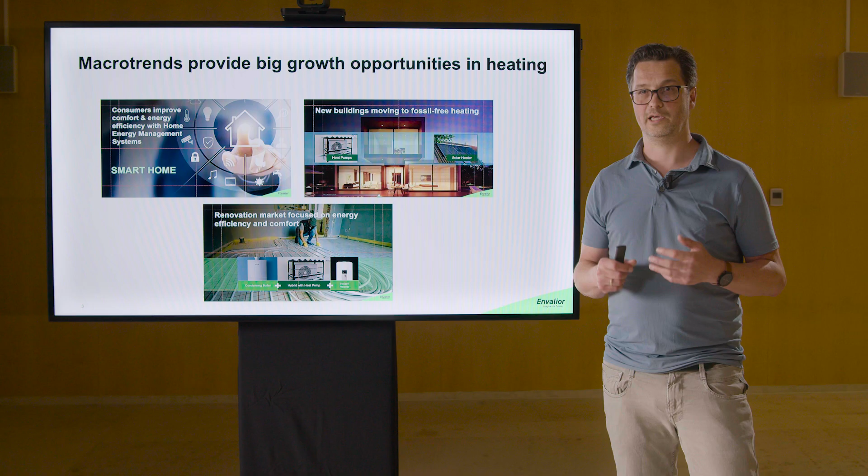These macro trends really provide changes, but also big growth opportunity for the industry. Governments and consumers are investing more money to become more energy efficient and less dependent on fossil energy. Simultaneously, the fast-growing middle class is also investing more money in comfort in and around the house. This is further accelerated by COVID-19, which changed the way we work by applying a virtual-first culture. We simply invest more money in our home as we spend more time at home. So what does it mean for the industry in heating and cooling?

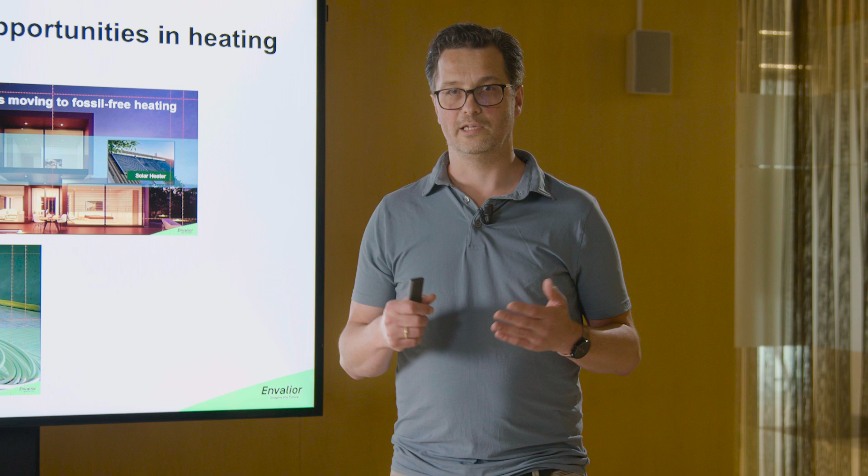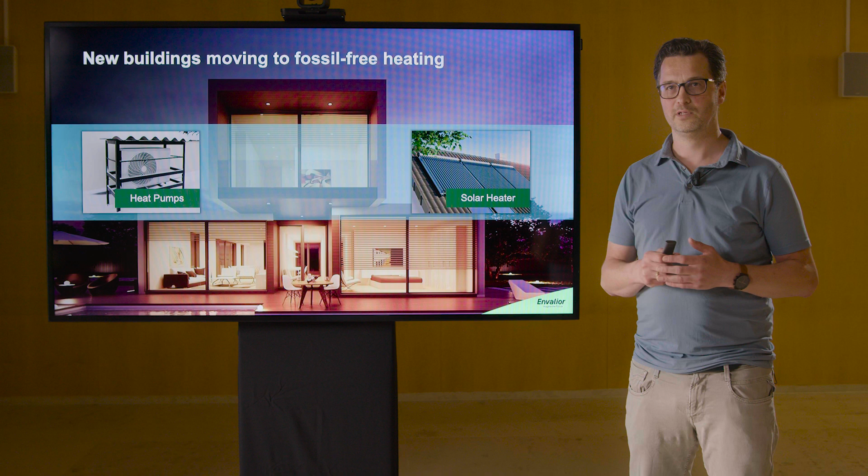For new buildings, the isolation is often much better, and the desired low-temperature floor heating is sufficient to provide comfort. Fossil-free heating and cooling is therefore more common practice, and in many countries even obliged by governments for most new houses that are built. Gas and oil heaters are less needed for new houses as they will be equipped with heat pumps and solar energy systems. And lately we do see that the electricity grid is not always ready for increased electricity consumption, which is somewhat slowing down this adoption.

So for renovation of existing houses, the government guidance and consumer needs are somewhat different. I have that on the next slide.

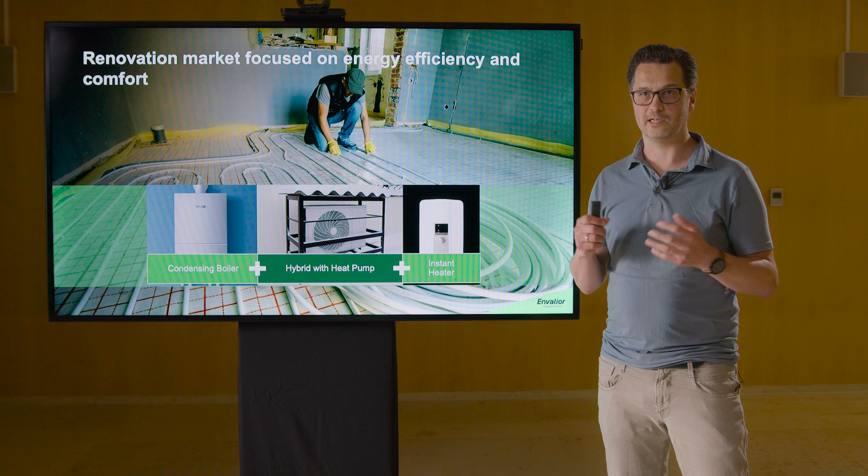For renovation work, there's also a clear wish to become less dependent on fossil energy, to reduce the energy consumption and to increase the comfort. For relatively new and well-isolated houses, it is technically still possible to become fossil-free, but it's still a big investment to switch to low-temperature heating and to heat pumps. So for all the less isolated houses, the total investment cost and space needed to become fossil-free remains actually a big challenge. So for renovations, most governments require hybrid heating systems as a minimum to reduce the fossil energy consumption.

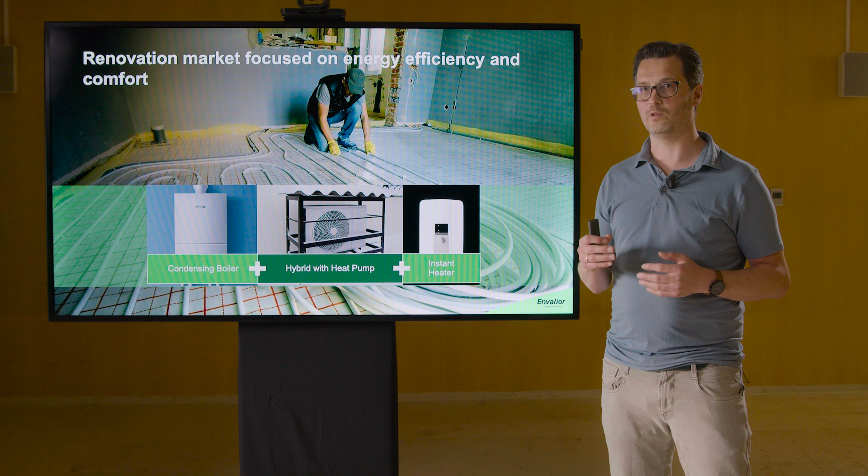So to save more installation space and to improve comfort, consumers often also choose to have an additionally small instant flow heater, as you can see here on the slide.

Also in every household, prioritizing energy management and cost efficiency is increasingly crucial. Internet-connected smart heating and cooling systems are streamlining energy usage and expenses. Solar energy is harnessed and utilized in real time or stored for later use. Electrical vehicles need to be charged, but can also act as a potential home battery. Next to that, you see automatic solar screens help to regulate the indoor temperatures and prevent unnecessary cooling. The significance of home energy management systems is on the rise, ensuring comfort and facilitating seamless communications between all the devices.

All these macro trends require you to increase the innovation speed, and this is also a big growth opportunity for you. You really need to catch up to survive in general.

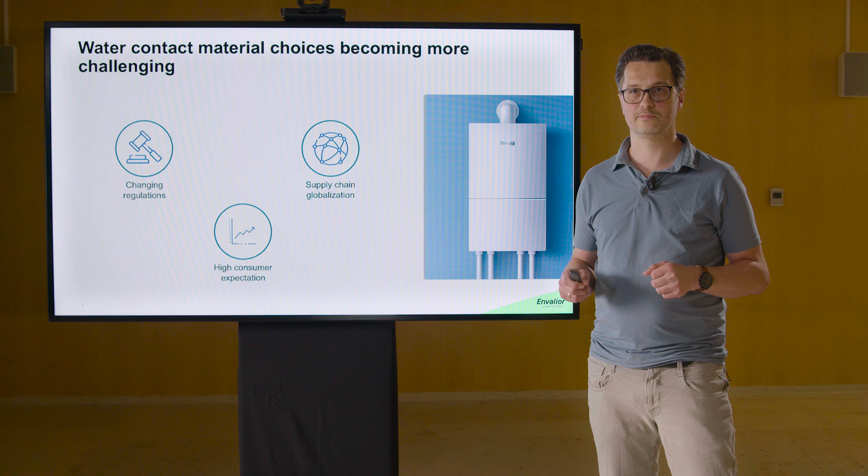You may expect that part functions are changing as well, and the design space becomes tighter, and as a result the material requirements are changing. All those growth opportunities are great, but as if growth itself is not challenging enough, there are additional big challenges making your life harder. So let me elaborate on those a little bit.

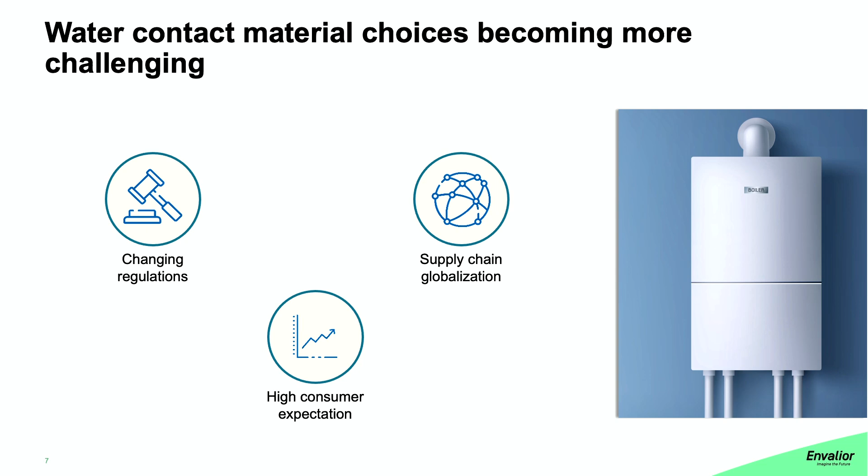You must keep up with all the regulation changes. With recent big global events, people now also realize more and more that we have a very complex global supply chain. And lastly, consumers have high expectations. They want a good price, and can easily find information online on brand performance. So choosing the right water contact material is becoming more and more challenging.

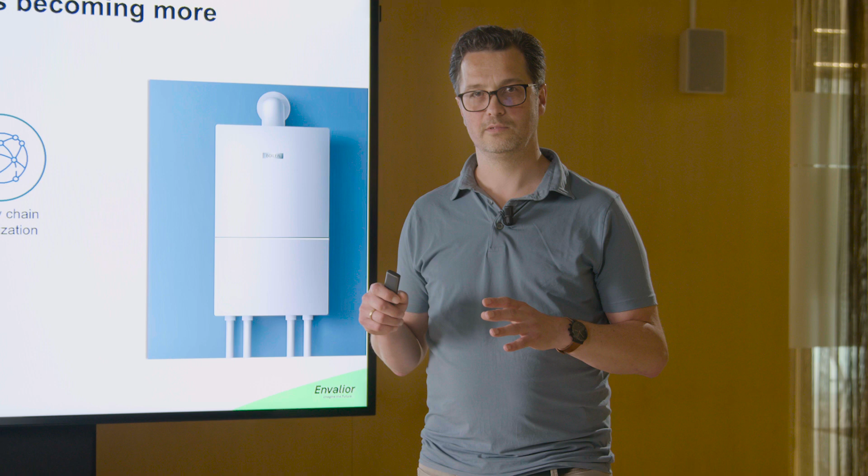In general, when choosing water contact materials, there are several key factors influencing the choice. Traditionally, many parts are made from brass, but this is becoming increasingly expensive. Especially for higher production volumes, plastics become much more attractive.

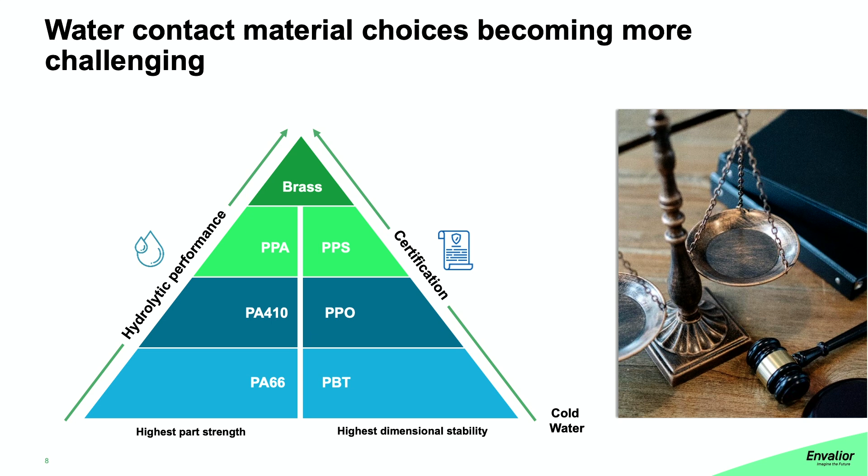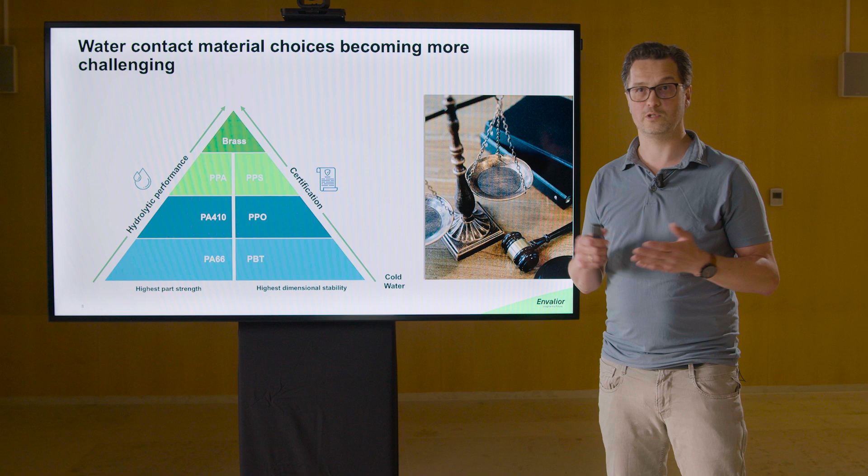Many companies often like to work with polyamides as they are tough and reasonably priced. For higher use and certification temperatures, you really need to have hydrolytically more stable or lower leaching materials. You can, for instance, think about polyamide blends, longer chain polyamides like polyamide 410, or semi-aromatic polyamides as shown here on the slide. When a part needs to be with very high precision, typically they choose PBT, PPO, or PPS, depending on the certification needs.

Brass is still often used but becoming a more and more expensive solution. Most common plastics to replace brass parts in this market are PA66 and PPO. And for many parts, the performance in the application has been good enough, so they are widely available, affordable, and good to work with, making them a preferred first choice.

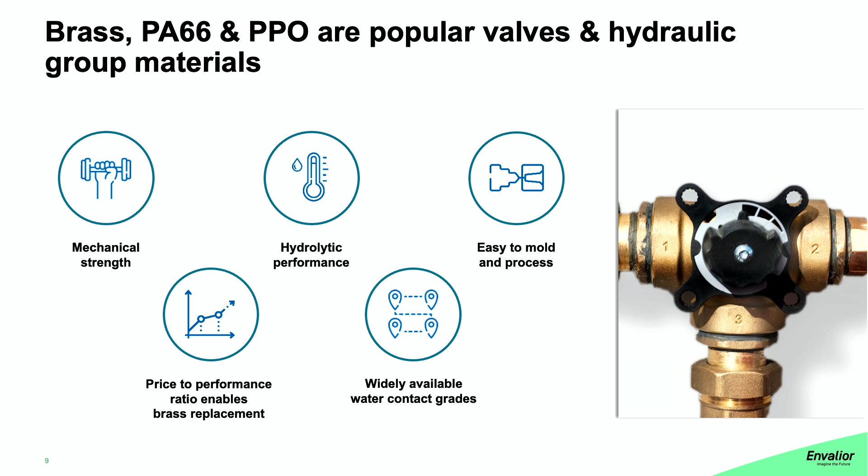However, in recent years, these materials have become under increased scrutiny as regulations tighten. For instance, compliance with the new KTW BWGL, the German drinking water contact regulations, is becoming more and more challenging at high temperatures due to the elevated leachable levels of PPO and PA66.

Furthermore, after years of use of this material, the design limitations of these materials have been reached. The room temperature mechanical performance of PA66 and PPO are constraining factors, especially significantly affecting the reliability of the parts in use and in assembly because they are working at the design limit. This constraint reduces further design flexibility and contributes to escalated development costs and timelines.

Finally, for PA66, significant supply chain constraints have been observed. The raw material supply chain is predominantly controlled by 3 global companies. Multiple force majeures in recent years have demonstrated a big impact on both price and availability.

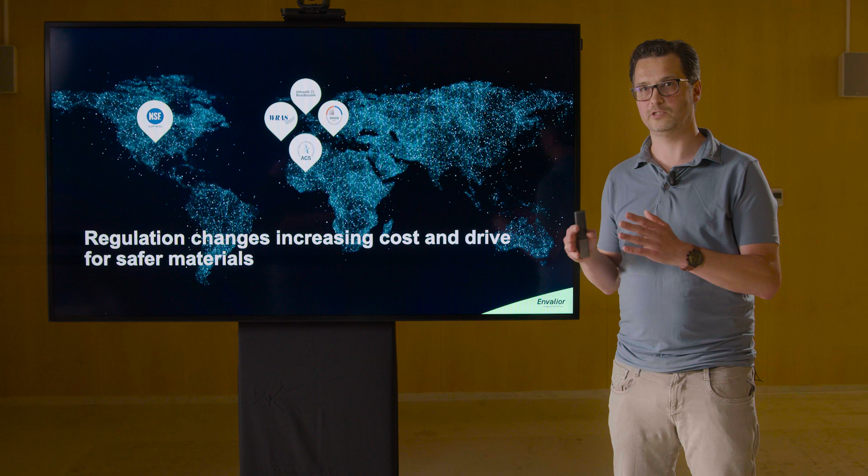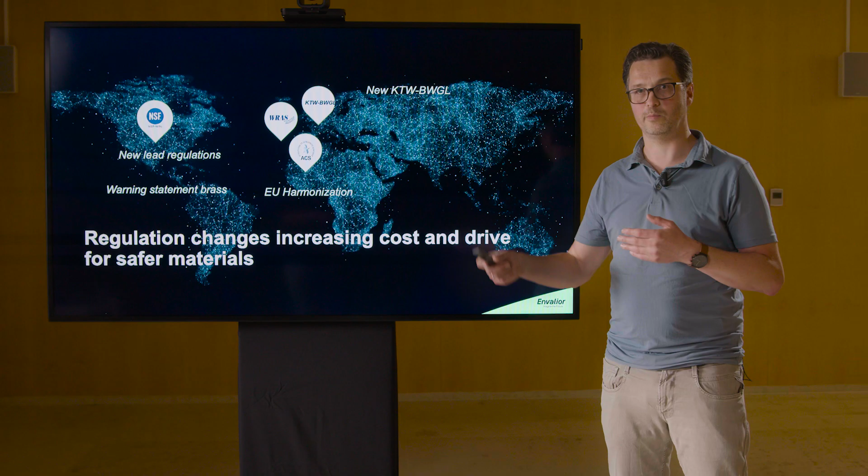So regulation change due to increased toxicological insights have a big impact on development cost and drive the use to safer materials. In Germany, the new KTW BWGL regulation is recently put into place. In the US, there is a new regulation regarding lead. In Europe, harmonization of the European water contact regulations is expected to come in a couple of years. So all these changes typically are accompanied by large certification costs and long certification lead times.

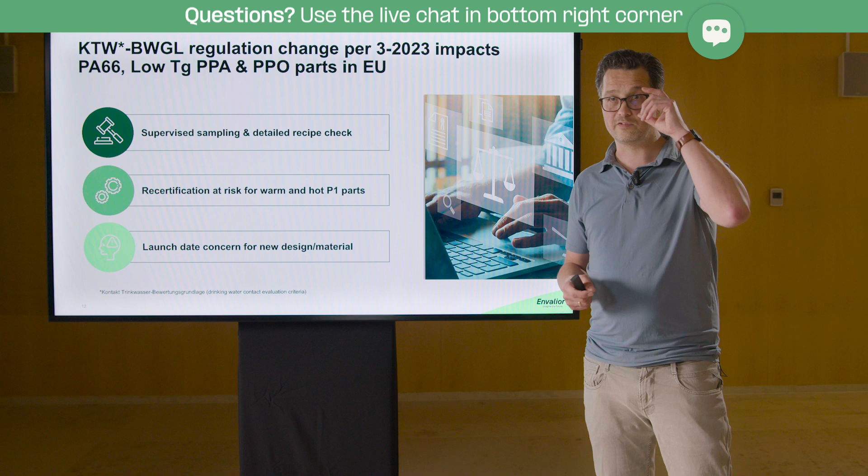To give some examples of the impact of regulation change, we have seen that many warm and hot water contact components require a material change as the material is simply no longer certified due to the stricter KTW regulation. The regulation now requires supervised sampling, and the recipe check is stricter and more time consuming.

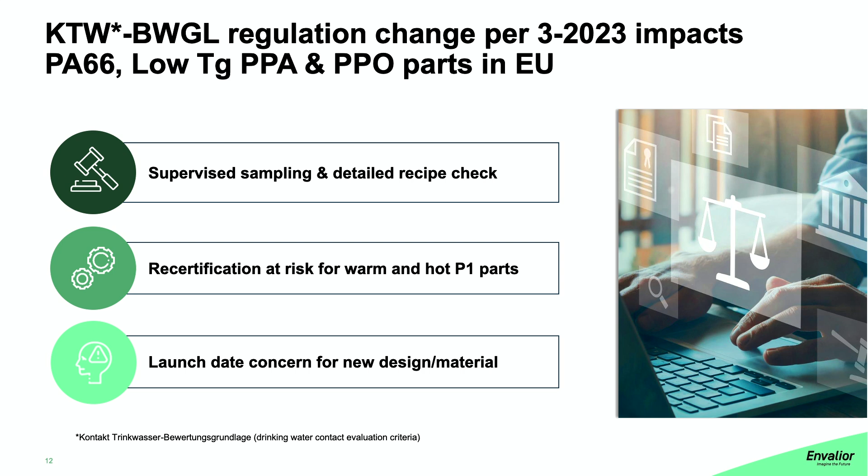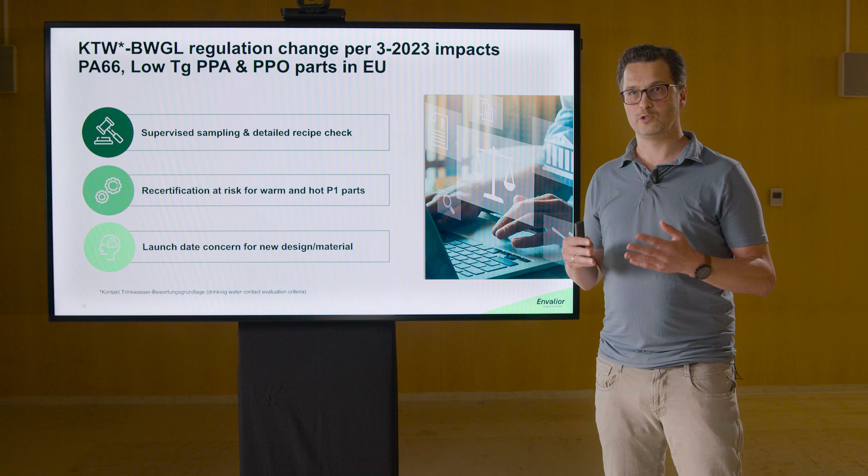Overall, this is increasing the cost and time of certification of both the material suppliers but also of the component manufacturers. We have encountered cases where this required a material or a design change, resulting in a big concern on reaching the launch date, but also large costs were made for these changes. And in some cases, even decisions were made to discontinue the offering of the final application in Germany, for instance.

In the US, the water contact regulation for endpoints has been changed. California Proposition 65 required lead-containing brass parts to be labeled with a cautionary statement. This is obviously a concern of negative brand exposure and cost to change the material.

In Europe, lead is labeled as a substance of concern. It is, however, still unsure how this affects the future regulation related to the production of brass and also components made thereof.

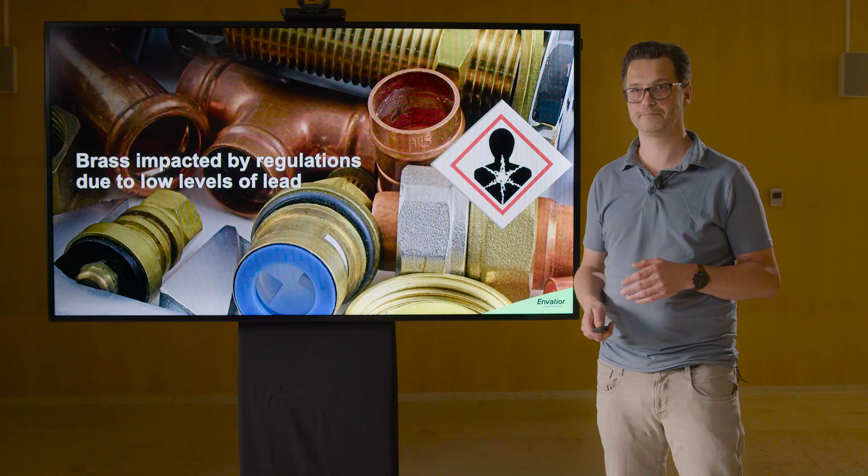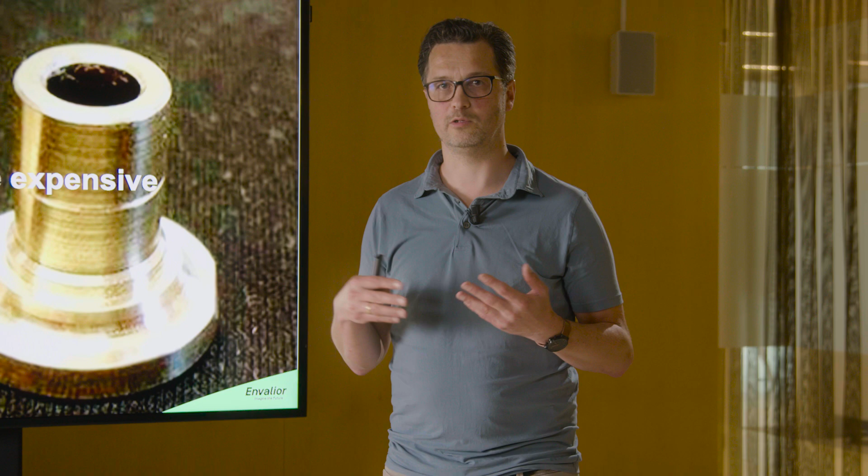Despite that brass is installed as favorite material, switching to a lead-free brass is not always desired. The raw material and production costs will significantly increase. The more complicated parts, the bigger the production cost difference, as machining becomes much slower and with worse product quality, leading to more quality issues. Especially for larger volume parts, the switch to plastics has really become much more attractive.

The past years, we've painfully experienced the drawback of our global supply chains. There have been many disruptions due to geopolitical events, COVID disruptions, and a gradual change in automotive materials consumption. These severely impacted the cost and availability of materials, parts, and end products. And companies want to be less dependent on supply chain disruptions, and this made companies consider their contingency plans in relation to material choices, production locations, but also second sources.

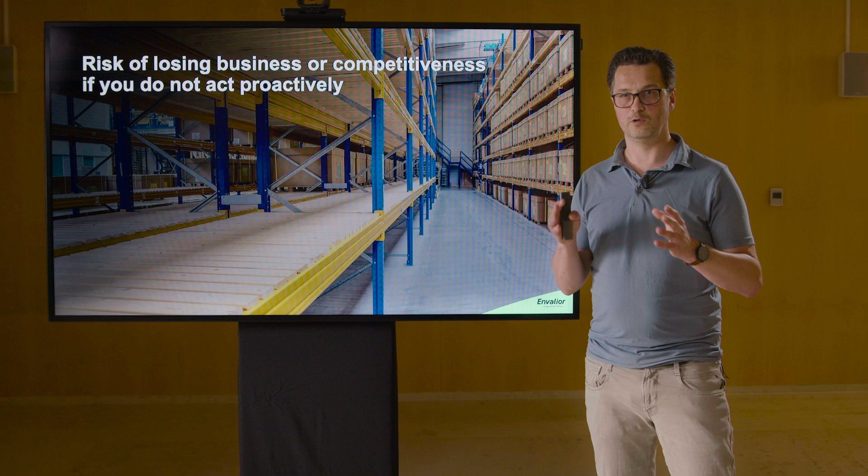So with all these challenges, there is a serious risk to lose business or competitiveness if you do not act proactively. Material change programs requiring redesign and retooling is typically costly and take a lot of time. Demand of new compliant materials increases exponentially, and forecasting is not possible if the material is not yet qualified. A worst case is a product which is not yet certified or that raw materials cannot be supplied, leading to delivery delays and lost shelf space.

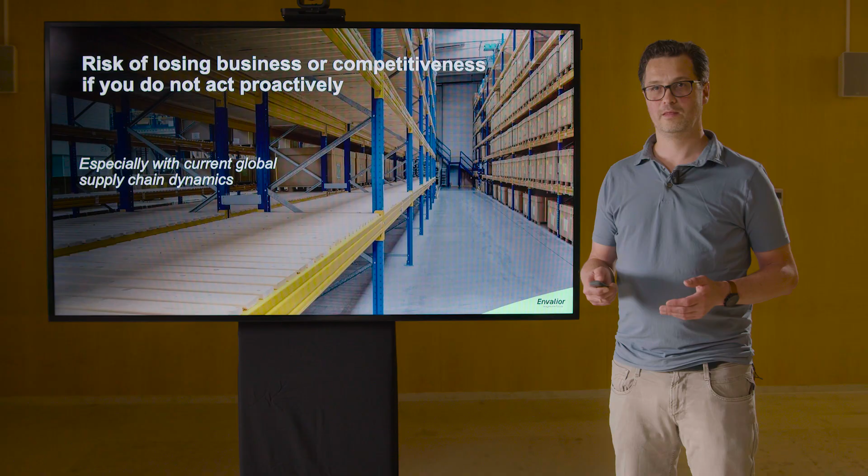We all know that the material or design change is a hassle and is costing a lot of time and money to select the right solutions. To meet the clock speed of current market dynamics, you sometimes need to innovate faster than you would have done in the past. With the increased speed, the risk of part failing at the consumer is also increasing. This risk and the earlier mentioned risk are something we all like to prevent. So what can you do to reduce these risks?

On a high level, a global development partner is needed who can help you reduce those risks and accelerate brass replacements with low leaching, high strength materials, and of course application development support. This can help you future-proof your designs for regulation changes and large supply disruptions. It is important that this partner has several material options available, as each design will have its own challenges.

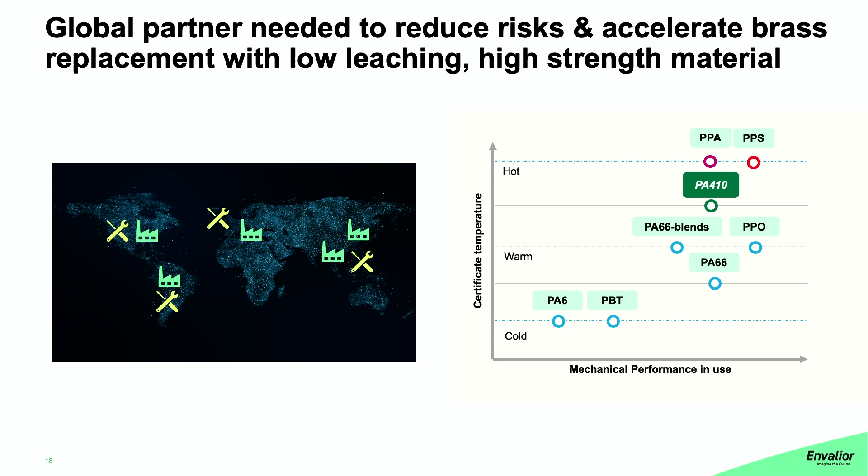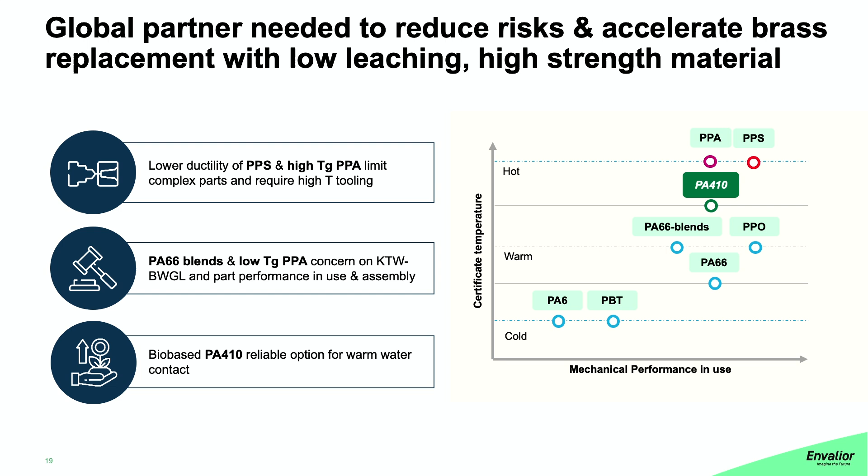PPS and high glass transition temperature PPA are very good materials up to hot water certified parts, but not always practical for complex parts as they require high temperature tooling and have a lower ductility. PA66 blends and low TG PPA have a concern on the German KTW certification for warm and hot water, but also on performance in use and in assembly.

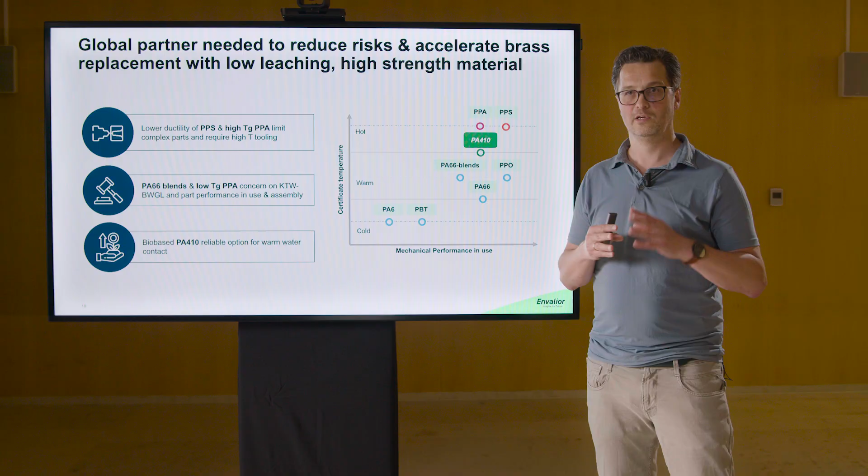Longer chain polyamides, such as polyamide 410, can be a very good option for many warm and hot water certified parts. And for warm water contact parts, PA410 can actually improve the reliability in assembly and use, but specifically for German KTW hot water P1 parts, they are simply out of reach for this material. As you can see, each material has pros and cons, and technical support can help you make the right choices.

I think Envalior can be that partner. We have a broad and safe water contact portfolio and supportive competences from material know-how to CAE and part design to prototyping and cost estimations. This helps you reduce risk and increase the speed of your innovation. In the next couple of slides, I'd like to give you some examples how we can help reduce risks and increase your innovation efficiency with our materials and support.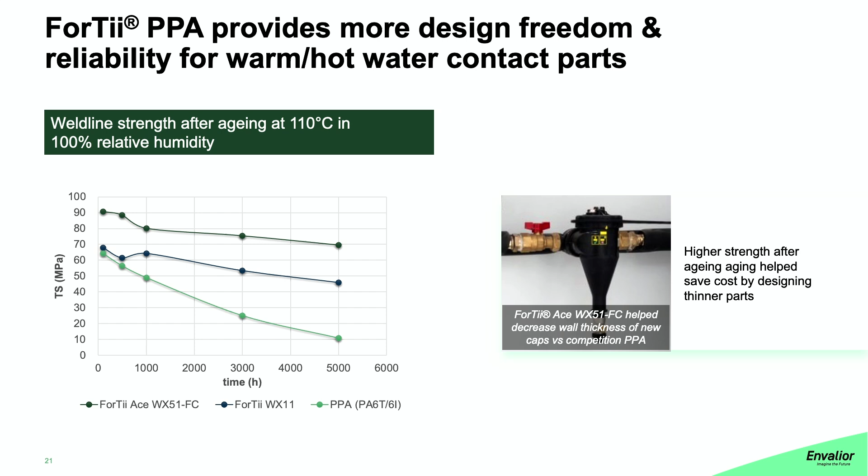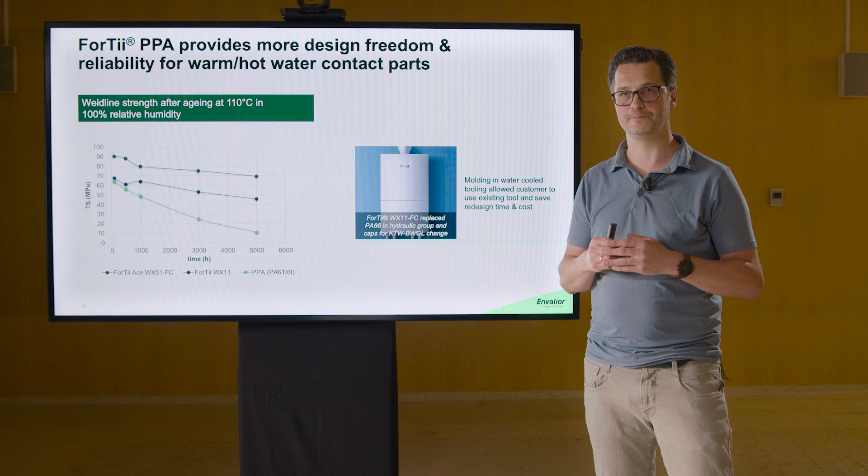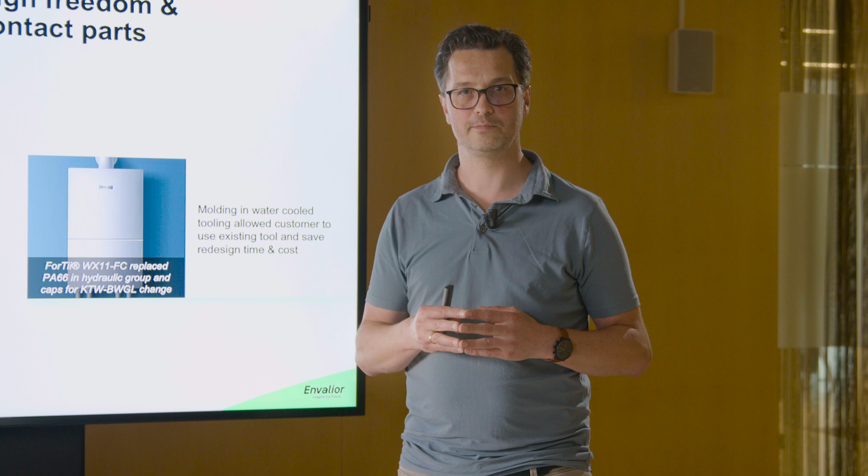There's also a second ForTii PPA example, that's ForTii WX11-FC, which also has a good weld line strength retention and can be injection molded in water-cooled tooling due to its good flow and lower glass transition temperature. This grade allowed the customers to replace PA66 in the hydraulic group components, which was no longer able to meet the new KTW regulation requirements. With minor adjustments to the water-cooled and complex injection molding tool, we have been able to switch it to a ForTii. This prevented a costly and time-consuming full redesign of all the parts.

As you may know, for PPS, flash is often an issue. It causes post-processing of injection molded parts, is aesthetically not pleasing, or it causes some flow restriction in the application. Our Xytron PPS hot drinking water contact grades offer a good balance between flow and flash and provide a high quality, reliable and aesthetic looking part.

In terms of mechanical performance, it's very much on par with competition PPS, as you will see on the next slide. Overall, the performance and aging of our Xytron PPS, as shown here by the plots, has good weld line strength retention, similar to competition PPS. Due to the better flow and flash balance, our Xytron G4020DW-FC provided additional reliability for parts where the initial weld line strength is challenging due to the flow critical cavities.

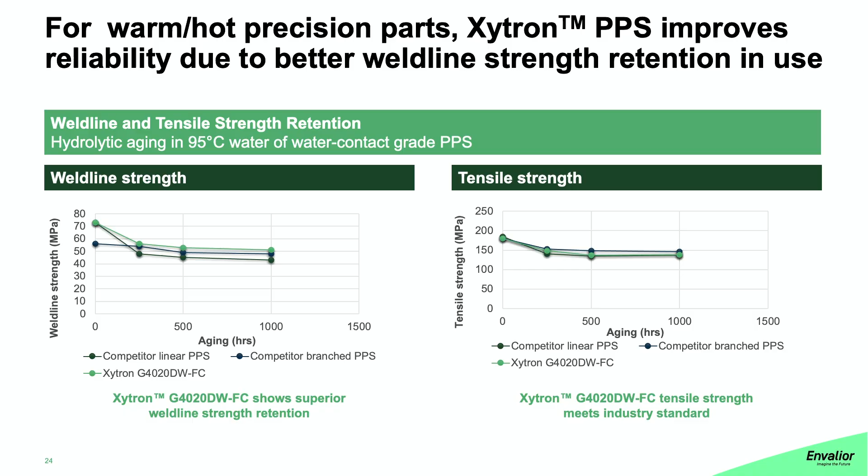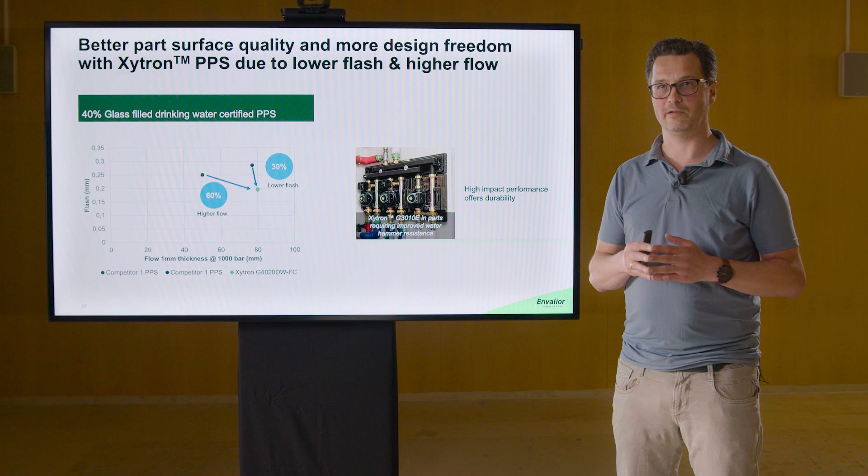Similar to the standard 40% glass-filled solution, our hot drinking water contact certified 30% glass-filled and impact modified PPS offers additional reliability when the part sees a lot of repetitive water hammer impact. Similarly, its toughness helps to improve the initial burst pressure.

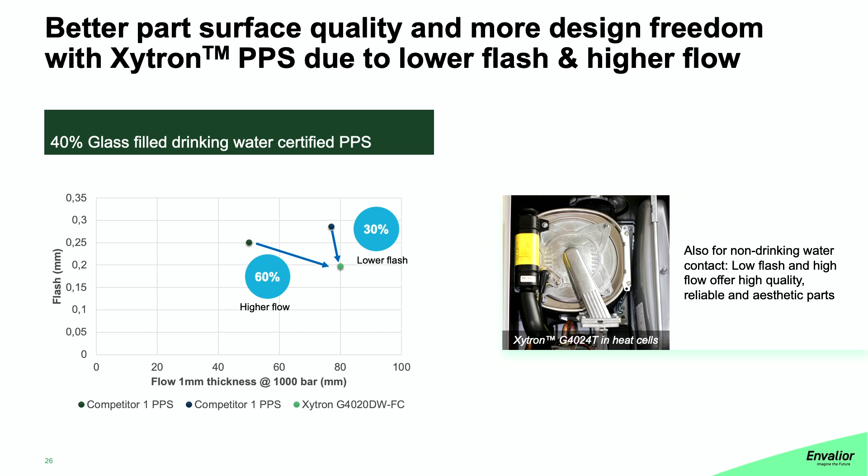Xytron PPS is also used in non-drinking water contact parts where productivity, high temperature hydrolysis resistance, and chemical resistance are key. You can think, for instance, of this condenser unit of the heat cell of a gas heater. Xytron PPS provides on-par part performance with similar competition materials and can be used in the same tools. This has helped some of our customers strengthen their contingency plans.

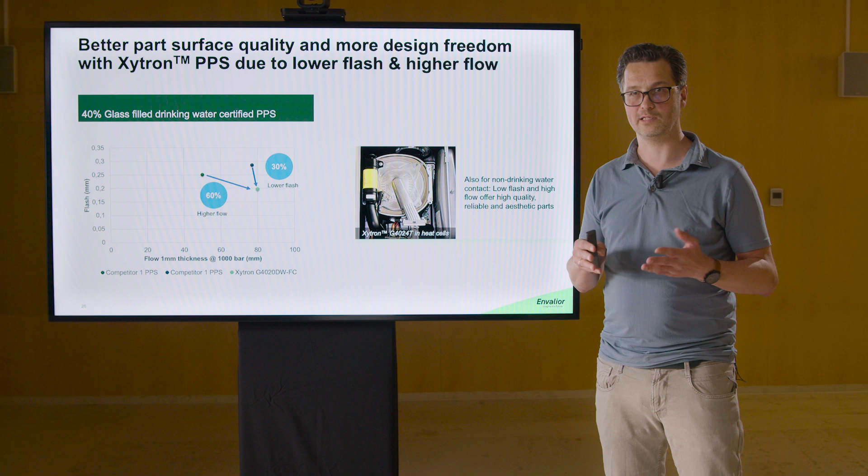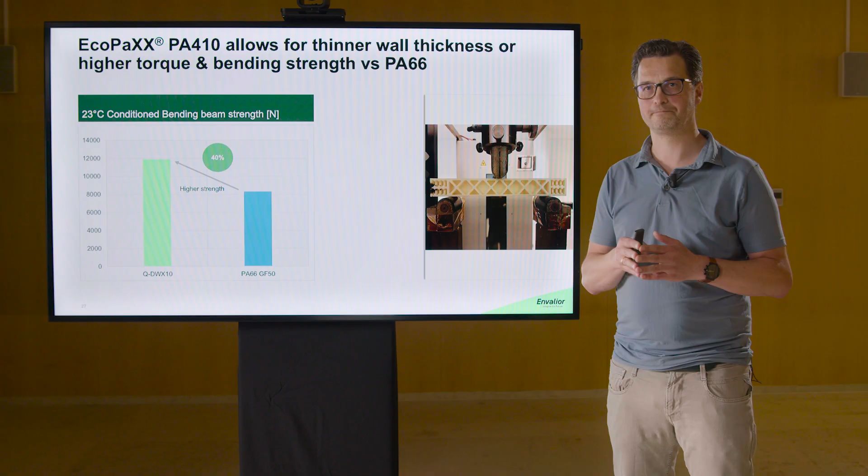Next to PPA and PPS, we also have EcoPaXX, a polyamide 410 drinking water contact grade, which allows for designs with thinner walls because of the higher conditioned part strength. This especially helps in reducing the failures in assembly of the part where a higher torque can be applied.

So EcoPaXX has, for instance, replaced PPO and PA66 in instant flow heater components in the same tool when KTW regulation changes required a material change. The alternative low glass transition temperature PPA was not able to meet the requirements due to the lower property retention.

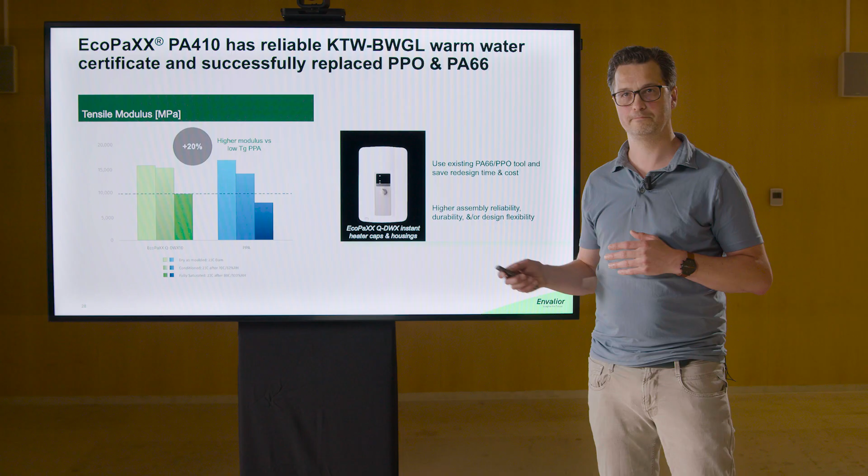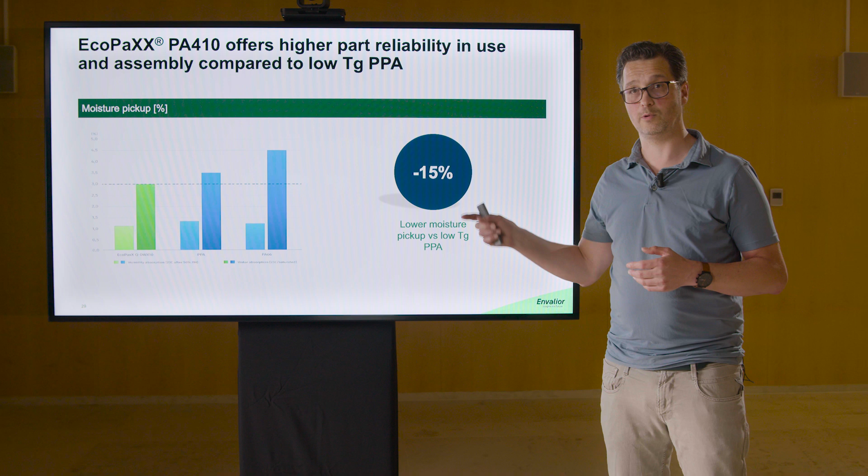The key reason for the enhanced conditioned performance of EcoPaXX is the longer C10 diacid. EcoPaXX PA410 therefore absorbs less moisture compared to PA66, and even 15% lower moisture pickup versus a low glass transition temperature PPA, as you can see here in this plot. The hydrolytic strength is also improved compared to the low Tg PPA. EcoPaXX QDWX10 shows about 30% higher strength after hydrolytic aging at 95 degrees in water, compared to a low glass transition temperature PPA.

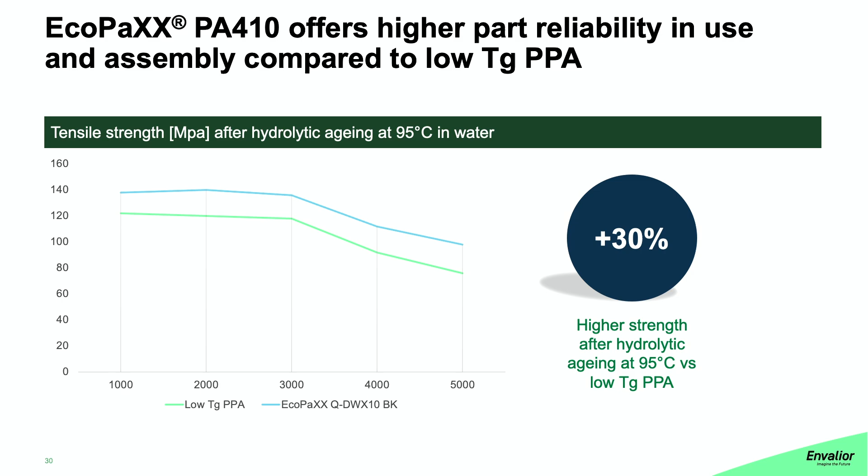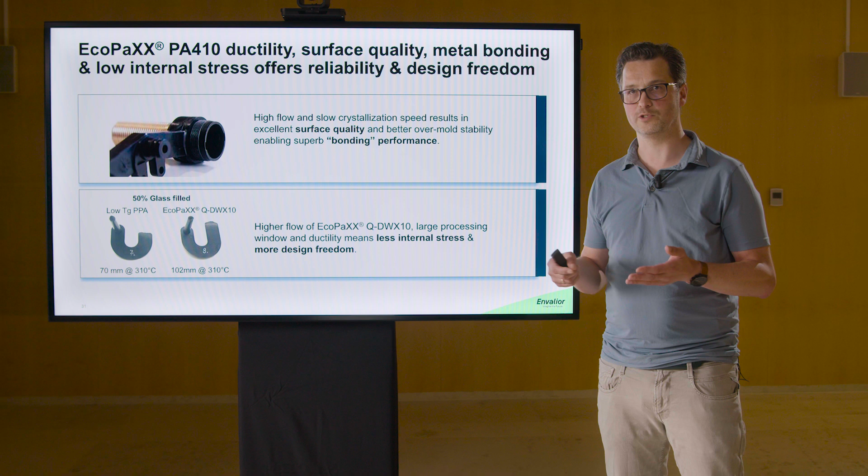So EcoPaXX allows designs with thinner walls, higher torque in assembly, or higher bending strength with the same dimensions. Another often praised advantage of EcoPaXX is the ease of processing and its broad processing window. The high flow and lower crystallization speed result in excellent surface quality and better overmold stability, enabling superb bonding performance to the metal. With EcoPaXX, parts can be molded with less internal stress and you have more design freedom.

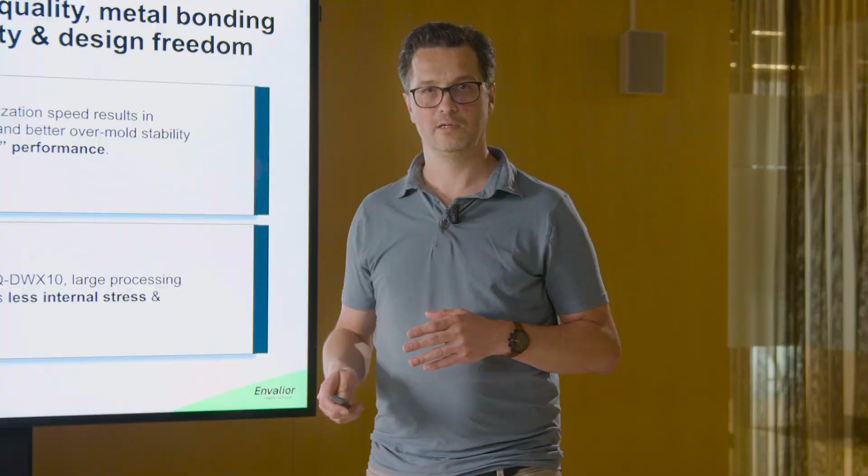The last benefit of EcoPaXX to mention is the low carbon footprint of the base polymer, among others because of the C10 diacid, which is bio-based. When needed, the carbon footprint can be further reduced when we use a C4 diamine, which is bio-based via mass balancing.

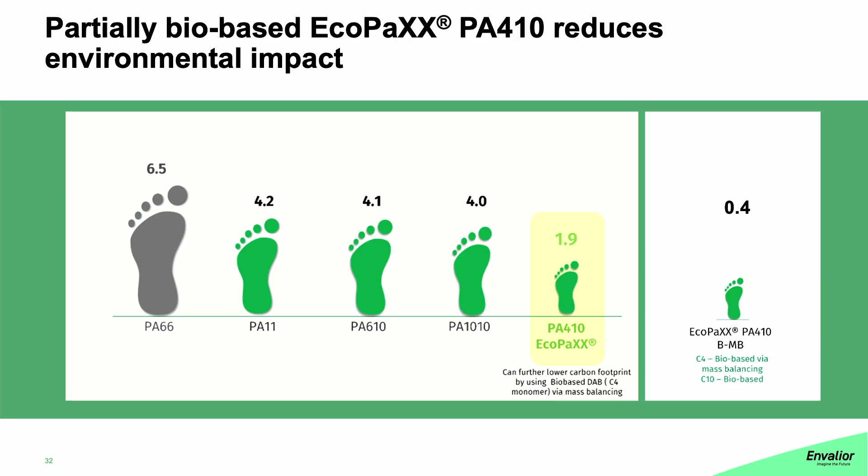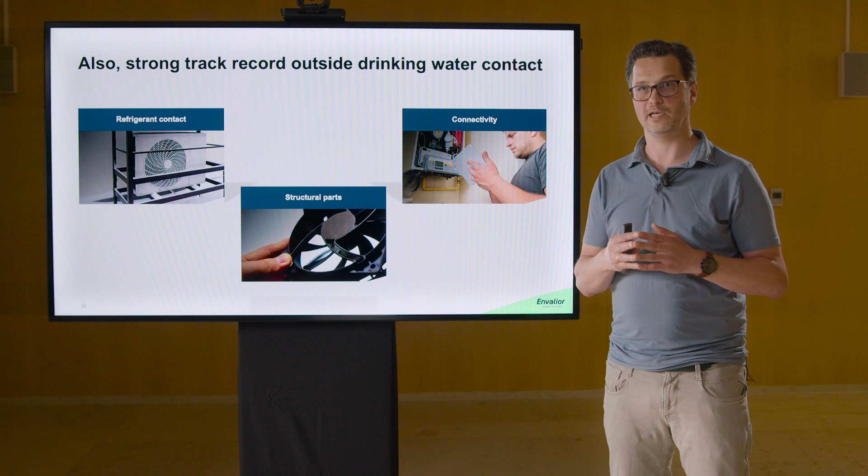Besides helping you with water contact components, we also have a good track record outside water contact in, for instance, refrigerant contact, connectivity, and other structural parts. These are also areas where we can help you.

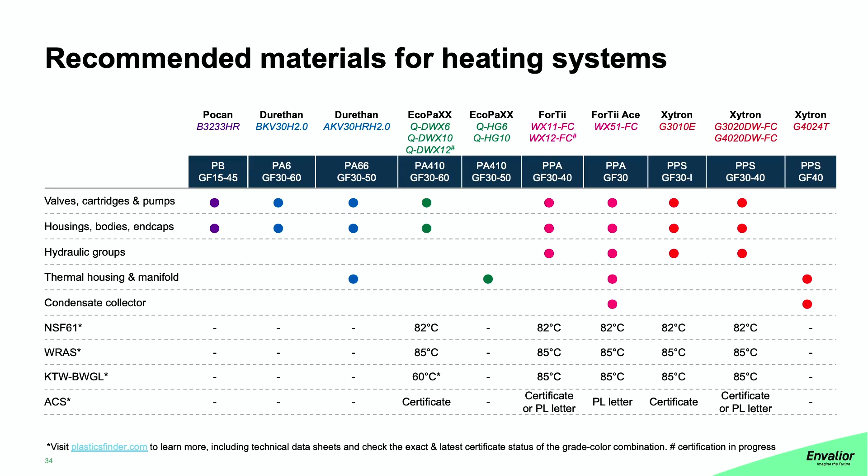Before closing, I briefly like to show you an overview of our main drinking water contact materials and their certificates. Next to that, our main non-drinking water contact materials used in heating systems are also placed in this overview. I will not go into all the details now, but the information can be reviewed later in the slide deck. I hope our story on how trends are affecting your material choices has been insightful, and that it helps you reconsider how you make material choices so that you can make better future-proof plans and innovate faster.